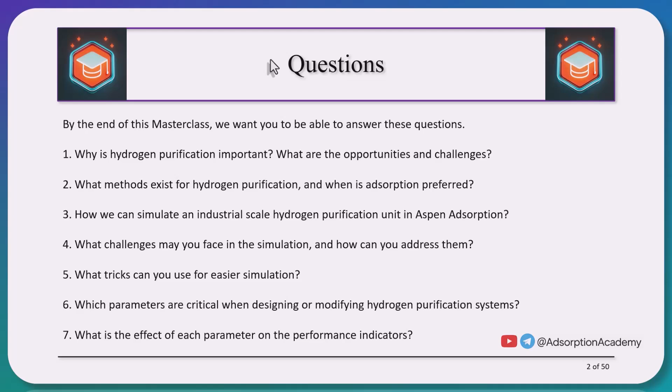Additionally, we will explore practical tips and tricks to make simulation easier and reduce errors. Finally, we will discuss the key parameters involved in designing or modifying a hydrogen purification system, as well as the effect of each parameter on performance indicators such as hydrogen purity, recovery, and specific energy consumption.

To begin, let's explore why hydrogen matters in the first place. Hydrogen is a versatile and clean fuel, and it is also abundant in nature. It can be used as a fuel, a source of heat, or as a feedstock in various industries. Because of this, hydrogen can play a key role in decarbonization of many sectors, especially those where reducing emissions is especially challenging, such as the steel and cement industries.

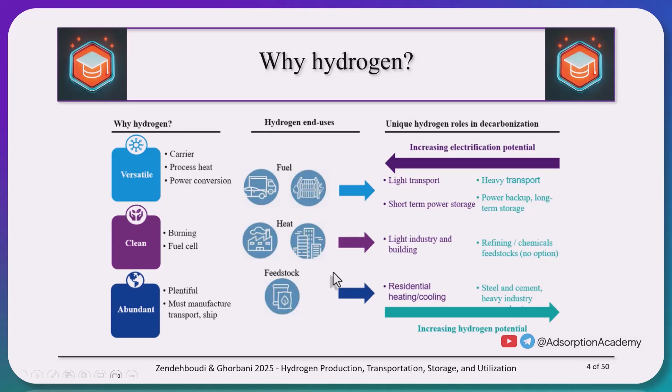As you know, addressing climate change is one of humanity's most urgent needs, and it has been framed as the net zero emissions goal. It is estimated that by 2050, all countries will take action toward achieving this target. According to the IEA report, replacing fossil fuels with hydrogen in sectors where electrification is difficult, such as the steel and chemical industries, or using hydrogen as a fuel in ships and aircraft, is a key strategy that has been highlighted.

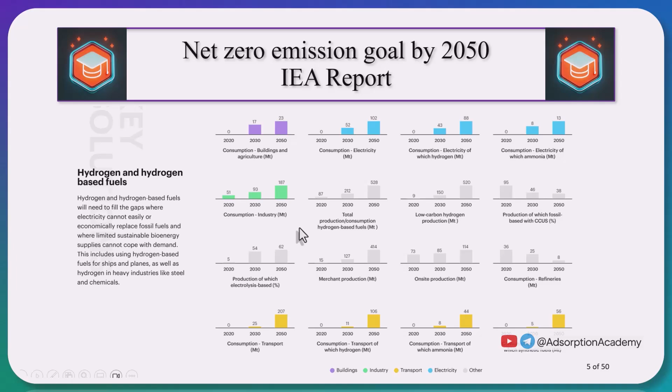By 2050, the use of hydrogen in various sectors such as buildings, industry, transportation, electricity, and others is expected to increase significantly. This highlights the strong opportunities in this field, both in academia and industry, and shows that hydrogen decarbonization will remain an area of active work for many years to come.

As we mentioned, hydrogen plays an important role as a feedstock in many industrial processes. It can react with CO2 to produce formic acid, methanol, or methane, and with nitrogen to produce ammonia through the well-known Haber-Bosch process. Hydrogen can also be stored by liquefaction or in compounds known as liquid organic hydrogen carriers, or LOHC. These carriers can store hydrogen in different forms and later release it again through dehydrogenation. Therefore, in industry, hydrogen plays an important role as a feedstock, and its purification is an essential process.

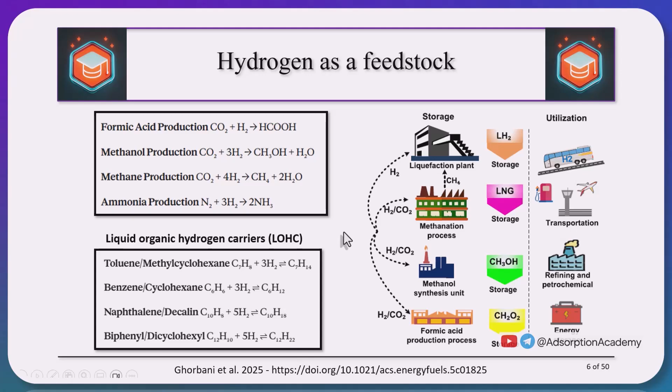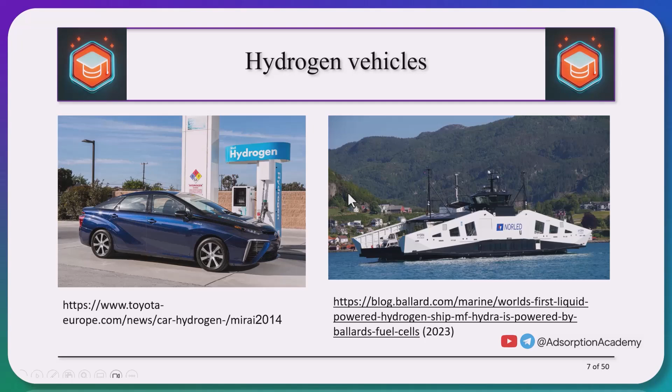Here are two examples of hydrogen applications in transportation. On the left is a car designed by Toyota, powered by hydrogen fuel, which was built in 2014. On the right is the first ship operating with liquid hydrogen and Ballard fuel cells, launched in 2023. Today, these efforts continue, and we are seeing the replacement of fossil fuels with hydrogen in airlines, trains, and many other modes of transportation.

Now that we understand hydrogen's importance, let's look at how it is produced. There are several production methods, and hydrogen is named according to the method used. For example, hydrogen produced by electrolysis is called green hydrogen, while methods that emit CO2 are classified as gray or blue hydrogen, depending on whether the CO2 is captured.

The most common method is steam methane reforming, or SMR, which accounts for more than 80% of global hydrogen production. SMR has a relatively high conversion rate and remains economically viable. Natural gas reacts with steam in reformers to produce hydrogen and CO2. If CO2 is captured and stored using carbon capture and storage, or CCS, the product is called blue hydrogen. If CO2 is released to the atmosphere, it is gray hydrogen.

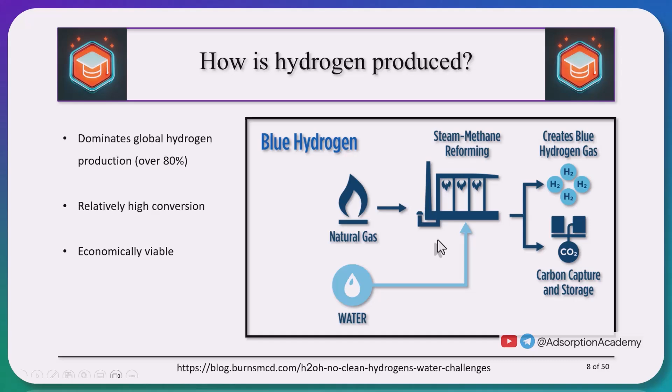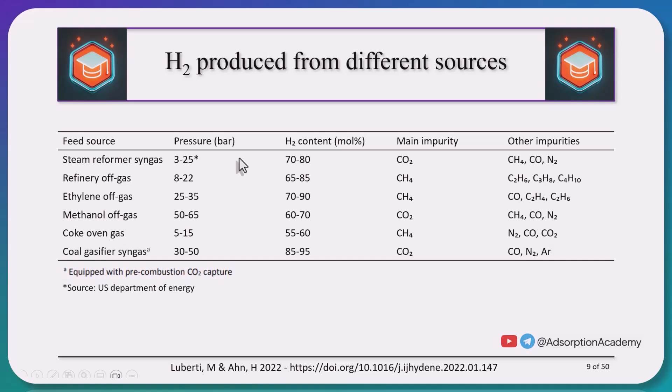The dominant SMR route typically delivers gas at about 3 to 25 bar, 70 to 80% hydrogen, and contains impurities such as CH4, CO, N2, and CO2, with CO2 usually being the main impurity. Next, we need to determine how much purification is required for hydrogen produced by an SMR unit or supplied from other sources. The required purity depends on the intended end use.

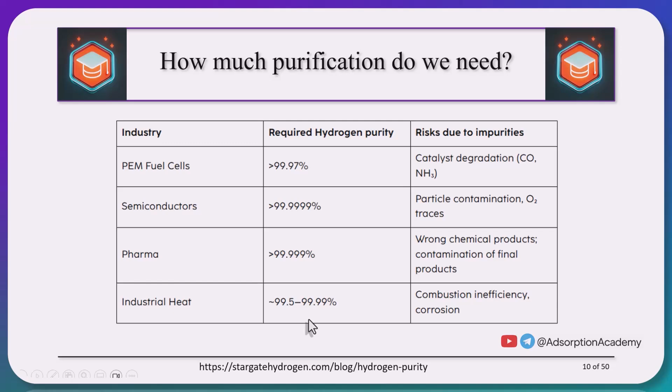For instance, PEM fuel cells typically require very high purity, greater than 99.97%, because even a few ppm of carbon monoxide can poison the catalyst. In the semiconductor industry, purity requirements are even stricter. Trace impurities that are acceptable elsewhere can be unacceptable there. By contrast, when hydrogen is used simply for heat, the specifications are much looser. The main concern is avoiding any contaminants that would reduce combustion efficiency or damage equipment.

We now look at the main methods for hydrogen purification and how they differ. The three common methods are PSA, membranes, and cryogenic separation. Each method has different requirements for the hydrogen content of the feed. For example, PSA typically performs best when the feed contains roughly 75 to 90% hydrogen. Why does PSA need higher hydrogen content in its feed?

In PSA, there is always a trade-off between product purity and hydrogen recovery. Increasing purity usually reduces recovery, and we will discuss this in more detail in this masterclass. If the feed already contains a high purity of hydrogen, it is easier to achieve high product purity without losing too much recovery. But if the feed has less hydrogen, reaching very high purity while keeping acceptable recovery becomes much more difficult.

Feed pressure and product flow requirements vary between these methods, and the values shown in the tables are only approximate, and in practice they can be somewhat higher or lower. In general, membrane systems are not economical for very high flow rates, while PSA is suitable across a wide range of plant sizes, from small units to fairly large installations.

Another key difference is achievable product purity. PSA can deliver very high purities of up to about 99.9%, while cryogenic plants typically reach around 98%. And membrane systems can achieve very high purities only when palladium membranes are used. In terms of recovery, PSA systems usually find it difficult to exceed 92% recovery, while cryogenic processes can also achieve recoveries close to 99%.

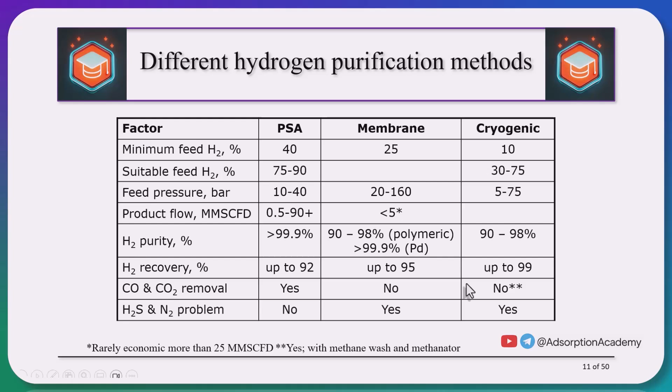H2S also presents risk of corrosion and equipment damage, while CO can poison or deactivate catalysts. Given that CO has an extremely low boiling point of about minus 190 degrees Celsius, cryogenic systems commonly employ a methane wash technique to dissolve and remove both CO and CO2.

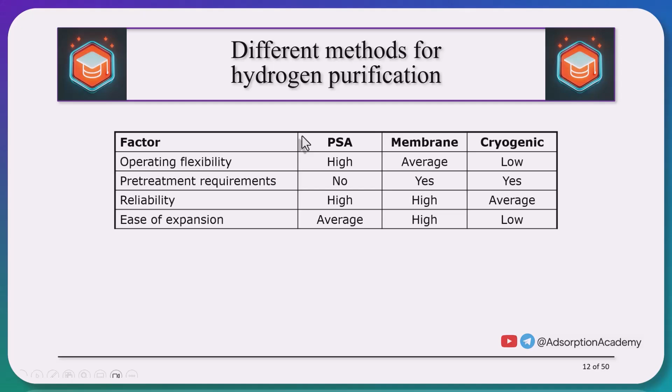Overall, the PSA method offers greater flexibility than the other methods, and as we have seen, does not require any pre-treatment. Here you can see some examples of industrial hydrogen purification plants licensed by different licensors. As you can see, these plants commonly use zeolite 5A and activated carbon as adsorbents, and the number of beds can range from as few as 4 to 10 or more.

The feed gases come from various sources. For example, one plant may use SMR off gas while another uses refinery off gas, and they operate at different pressures with varying levels of purity and recovery. The hydrogen capacities also span a wide range from about 1,000 normal cubic meters per hour up to nearly 400,000 normal cubic meters per hour.

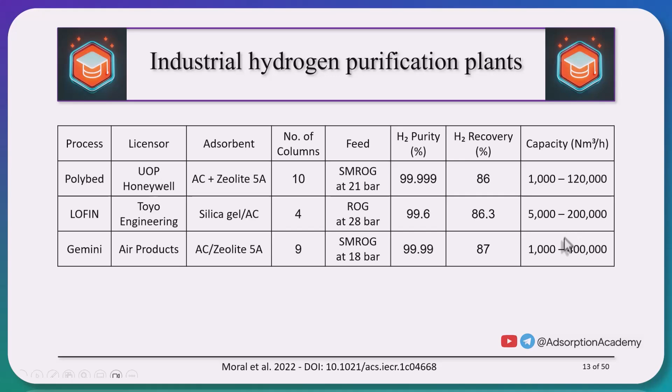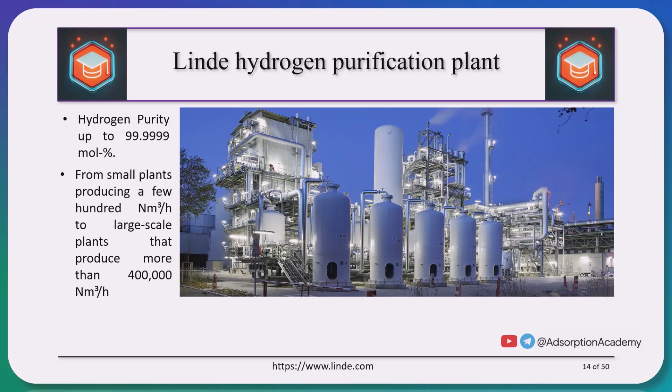This is the Linde hydrogen purification plant, which claims it can achieve purities of up to 99.9999%. Their smaller units can process a few hundred normal cubic meters per hour, while their largest plants are capable of handling more than 400,000 normal cubic meters per hour.

Now we want to look at the challenges that exist in simulating hydrogen purification systems using the PSA method, especially for industrial cases. First, adsorption systems are inherently dynamic and complex. This means that many PDEs and ODEs must be solved simultaneously, and the stiffness of the system adds to the difficulty. Some variables may change very quickly while others change slowly, making it challenging and time-consuming to solve the system. For instance, the pressure in the system may fluctuate suddenly, while the mass transfer rate of water may vary much more gradually.

Another challenge is the variability of isotherms. For example, even with the same material such as zeolite 5A, the adsorption capacity can differ depending on whether it is produced by different companies or laboratories. In industrial systems, this variability can also appear over time. Adsorbents that have been in use for a long period may show different isotherms compared to when they were brand new. Here, it is recommended that you definitely perform the isotherm test on the system that will be used in the future and use those IPs, or compare the data you get from literature with each other and try to use the data that is more in line with the reality of your problem.

Next is the kinetic data, mainly related to mass transfer coefficients or MTCs. As you've seen in the channel videos, breakthrough data, which is usually available in laboratory experiments, can be used to tune these values. In industrial cases, however, such data are often scarce, and because MTCs depend on parameters like flow rate and bed geometry, lab-scale values cannot be directly applied to industrial systems.

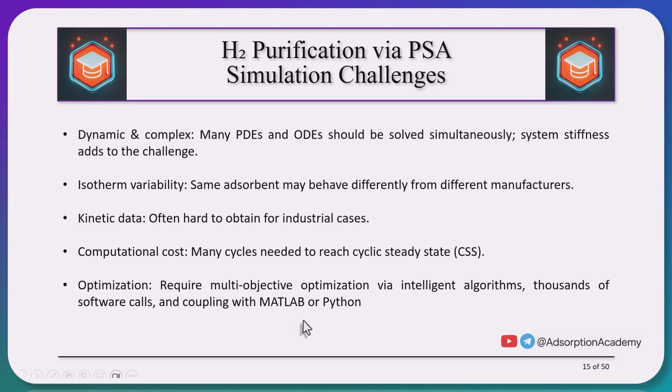Then, as mentioned, there is the computational cost, which usually requires running many cycles until the system reaches cyclic steady state, or CSS. Another important challenge is process optimization. This often requires intelligent algorithms, since there are many decision-making parameters and conflicting objectives that must be balanced. Such algorithms may need to run your Aspen Adsorption model thousands or even tens of thousands of times, each time reaching steady state. As a result, it is often necessary to integrate Aspen Adsorption with programming tools like MATLAB or Python.

Pressure swing methods are typically classified into three techniques. The first is the usual PSA method, where adsorption occurs at high pressure and desorption at atmospheric pressure. In this case, whether or not you need a compressor depends on the feed source. If the feed already comes at high pressure, no compression is needed. Otherwise, you must compress it to achieve a higher adsorption capacity. The second is the VSA method, where adsorption takes place near atmospheric pressure and desorption occurs under vacuum. Since desorption is done under vacuum, a vacuum pump is required, and its energy consumption must be calculated, similar to how compressor energy is considered in PSA.

The third method, often referred to as VPSA, combines both principles. Adsorption is carried out at high pressure, while desorption occurs under vacuum. In this case, the energy demand of the vacuum pump must be accounted for. And again, depending on whether the feed comes from a high or low pressure source, a compressor may or may not be necessary.